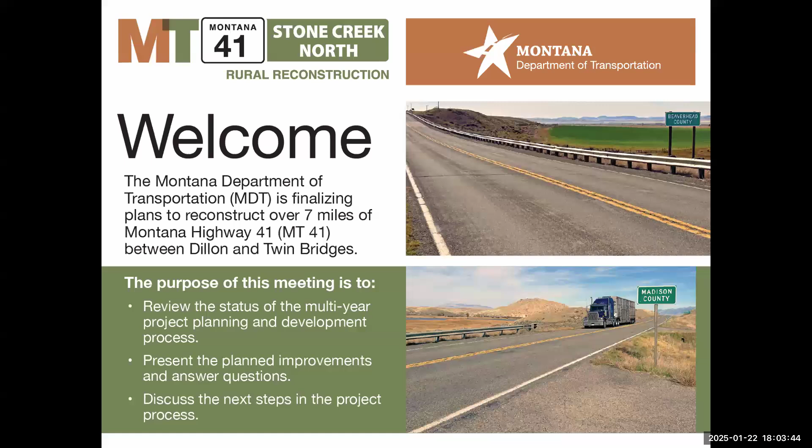Good evening, everybody. I'm Brandon Jones, Butte District Pre-Construction Engineer. Before I introduce the team, I want to read off MDT's mission statement: MDT's mission is to serve the public by providing a transportation system and services that emphasize quality, safety, cost effectiveness, economic vitality, and sensitivity to the environment. MDT maintains a staff with the resources and technical expertise needed to perform the workload for the majority of the state's transportation projects.

So I'll start introducing the project team, and we'll start off with Rebecca. Hi, I'm Rebecca Barbula. I'm with MDT, and I'm the Butte District Design Project Manager, located in the Helena office for MDT in roadway design. My team is responsible for producing the design plans and contract documents for construction, and I'm responsible for managing the project scope, schedule, and budget.

Thanks, Rebecca. Patrick Cross. Hi, I'm Patrick Cross. I'm the MDT Butte District Biologist, and my role is to work with the design team to minimize environmental impacts and ensure compliance with environmental regulations, and to coordinate with Montana Fish, Wildlife, and Parks on any fish and wildlife considerations that they have.

Thanks, Patrick. Sam? Hi, I'm Sam Ulrich. I'm the Environmental Project Development Engineer for the Butte District. I handle the National Environmental Policy Act regulations, as well as the Clean Water Act permitting for aquatic resource impacts.

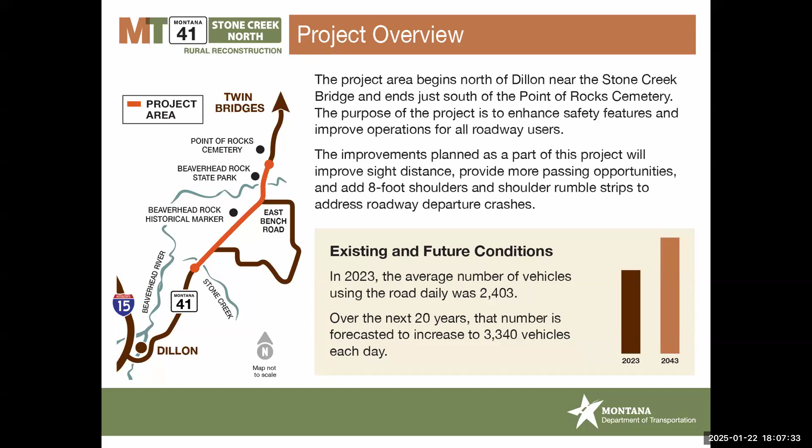And vehicle passing safety concerns. So some of the things we considered in the design included improving the sight distance, meaning how far a driver can see in front of them without an obstruction such as a hill, providing more passing opportunities, enhancing safety features, and addressing roadway departure crashes.

MDT began developing this project several years ago. Initial work included gathering and analyzing data, performing field studies, and hosting a public meeting. The information from the evaluations and the input from the public was carefully considered to develop the planned improvements we're presenting today. This project is now in final design and beginning the right-of-way acquisition phase.

Over the next about 2 years, MDT will be finalizing the project plans and permits, purchasing any necessary additional property needed to construct the improvements, and preparing for construction. The current schedule suggests the earliest construction could begin is in 2027, and construction is anticipated to take 2 full construction seasons to complete.

So essentially starting in summer 2027 and going through summer of 2028. However, construction is dependent on funding availability and will be scheduled once design plans are finalized and right-of-way and permits are acquired. Speaking of funding, on the next slide I'll share some information about project costs and where the funding for this project is coming from.

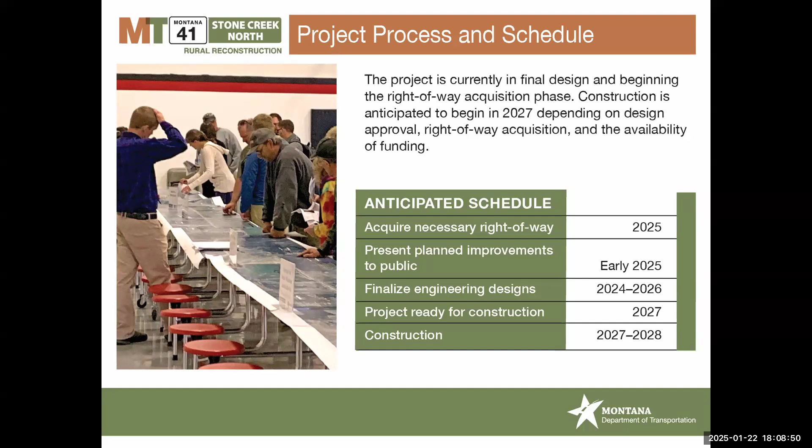This project is currently estimated to cost about $36 million to construct. MDT has acquired a $23.9 million grant from the Multimodal Project Discretionary Grant, which comes from the Infrastructure for Rebuilding America grant program. This grant program is overseen by the U.S. Department of Transportation's Office of the Secretary of Transportation.

Costs beyond the $23.9 million grant will be funded through a combination of federal and state funds, with a cost share of just under 87% federally funded and about 13% state funded. On the following slides, we're going to move into talking about the planned improvements and design considerations.

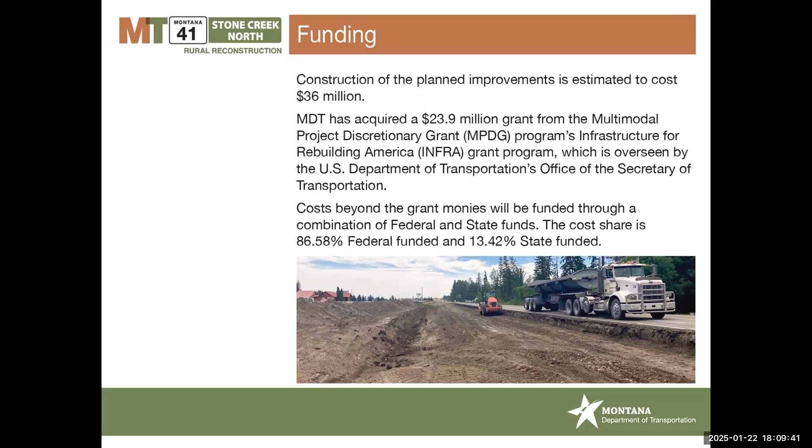As mentioned previously, Highway 41 is currently narrow and has steep slopes on both sides of the roadway and limited sight distance. MDT plans to implement several improvements with this project to enhance the safety features, including realigning the roadway north of the Beaverhead River, reducing the number of vertical curves and grades, which is also the steepness of the hills, and adding 8-foot shoulders.

As you can see in the image, we're going to be widening the total top width to about 40 feet, edge of pavement to edge of pavement. With that, we're also adding shoulder rumble strips and replacing the centerline rumble strips. We're also going to be flattening the steep slopes on the side of the roadway and upgrading guardrail and drainage within the project limits. I'll talk about the roadway realignment north of the Beaverhead River on the next slide.

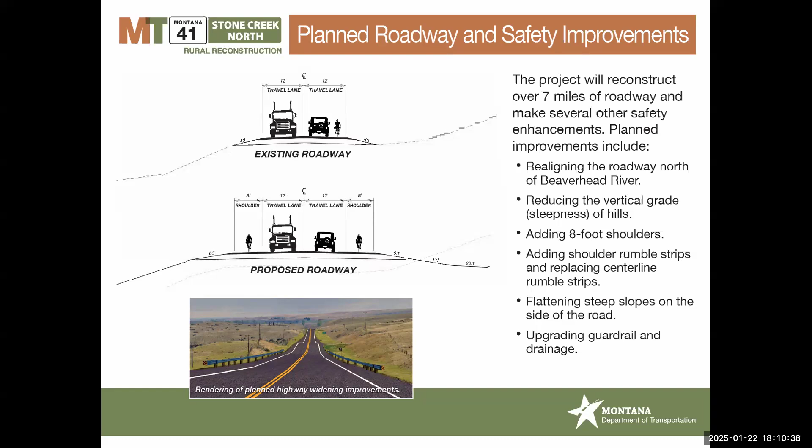MDT evaluated numerous roadway alignment alternatives north of the Beaverhead River Bridge. The top 3 alternatives shown on this slide were progressed for additional evaluation, where they were compared against several design criteria including cost, constructability, logistics from design, maintenance, and construction viewpoints, as well as environmental impacts. The orange alignment, as shown on the map view, can be seen traced right now.

It's the middle alignment being traced on the map view. On the right column of the table view, it says orange at the header. So that's the orange alignment, and it was chosen to pursue as the most practical and least environmentally damaging alternative based on the design criteria shown on the screen.

MDT teams involved in the design criteria analysis and evaluation included road design, which is my section, and the geotechnical section, which has to do with soils and the roadway foundation, making sure we're building on a stable foundation. Environmental, which covers wildlife, wetlands, and permitting. Hydraulics, which has to do with drainage, culvert drainage, as well as irrigation facilities in the area. Construction and maintenance were also involved in those evaluations, and those are just a few of the disciplines to name from the MDT side.

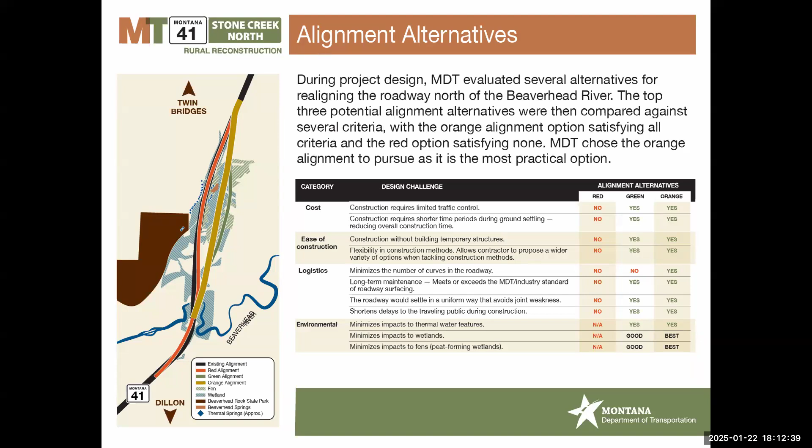As with any federally funded project, MDT needs to ensure the project is compliant with the National Environmental Policy Act, often referred to as NEPA, and its Montana companion MEPA. Using the NEPA-MEPA process, agencies like MDT evaluate the environmental and related social and economic effects of their proposed actions. Agencies also provide opportunities for public review and comment on those evaluations and their findings.

When a proposed action may significantly affect the quality of the environment, both NEPA and MEPA require the agency to prepare an environmental impact statement. Most of MDT's projects, including this one, fall under a categorical exclusion. MDT's categorical exclusion form is basically a miniature environmental impact statement.

This project is being reviewed under NEPA. This review includes a few other important federal acts. They include the Endangered Species Act for the handful of listed species near the project area, the Migratory Bird Treaty Act for nesting areas on the underside of the bridges, Section 404 of the Clean Water Act for impacts to aquatic resources, including wetlands, and Section 106 of the National Historic Preservation Act for effects on historic properties.

Additionally, other areas of consideration include wildlife crossings and recreational river activities. For this project, MDT conducted site investigations to look for potential environmental concerns and document the environmental baseline in the project area. Our analysis showed that the project should include specifications necessary to protect the environment.

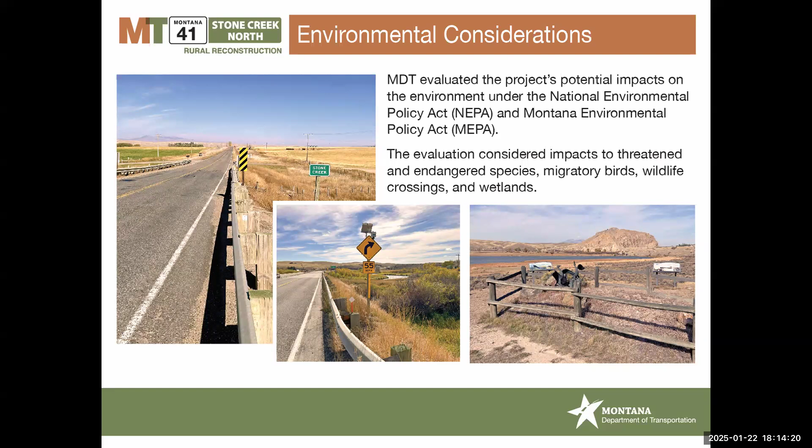In addition to the permanent design features, to minimize our environmental impact from the start, certain construction activities will have seasonal timing restrictions to avoid disturbing protected wildlife species and ensure compliance with some of the environmental regulations that Sam mentioned. Examples include, for trout conservation, there will be no in-stream work during the trout spawning seasons in the spring and fall.

That's part of our Montana Stream Protection Act permitting requirements, which are administered by Fish, Wildlife, and Parks. Stream protection permitting will also require that any equipment used for in-stream work must first be inspected for aquatic invasive species before the project begins.

For Migratory Bird Treaty Act compliance, any tree and shrub removal and removal of the Beaverhead River Bridge, places where birds might be nesting, must occur outside of the nesting season, that's from mid-April to mid-August. An exception could be if the contractor uses special methods of deterring nesting under the bridge, like installing nets that block access before the migratory birds arrive.

For golden eagle conservation, there will be no construction activities or staging within half a mile of Beaverhead Rock during the winter through spring golden eagle nesting season, in order to avoid disturbing documented nest sites there and ensure compliance with the Bald and Golden Eagle Protection Act.

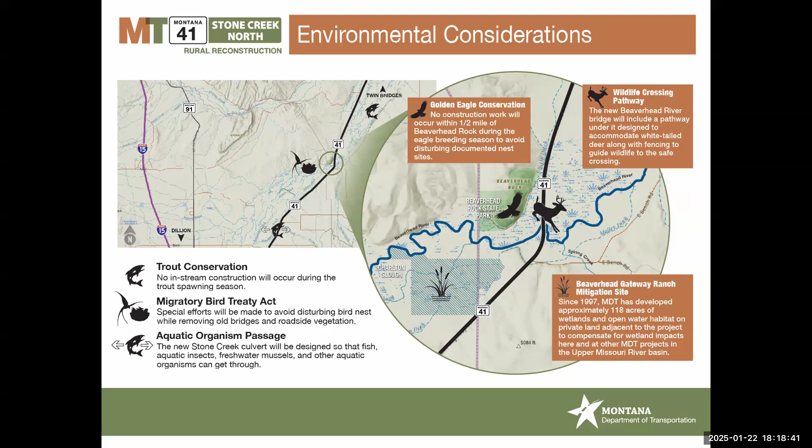The way it works is that every MDT project is reviewed for wildlife accommodation needs and opportunities. If recommendations for wildlife accommodations are made, then those recommendations work their way through all the MDT bureaus for review and approval. Approved wildlife accommodations for this project, which we'll see on the next slide, include a wildlife path that will be built under the Beaverhead River Bridge that provides enough headroom for white-tailed deer to cross.

There will also be wildlife barrier fencing, an 8-foot high woven wire fence that'll be installed on both sides of the Beaverhead River for about a half-mile total to help guide wildlife to the path underneath the bridge. That barrier fence will also include wildlife jump outs, which are one-way escape ramps that let the animals jump out away from the road, but not jump in towards it.

There will be wildlife guards, which are like double-wide cattle guards, and they'll be installed at approach roads and driveways to minimize the new fences' impacts on local traffic.

We'll also be considering an experimental electric wildlife deterrent mat at both fence ends to prevent wildlife from getting into the fenced section. There's an example of one that's in use on US 287 near Toston between Three Forks and Helena.

And then we will also on this project be including wildlife warning signs with flashing lights at the fence ends. So outside of the wildlife barrier fencing, we'll also be using wildlife friendly fencing, which is a 4-wire design intended to keep cattle and horses in while letting wildlife either jump over the fence or squeeze under it, and that'll be installed where appropriate as coordinated with the adjacent landowners.

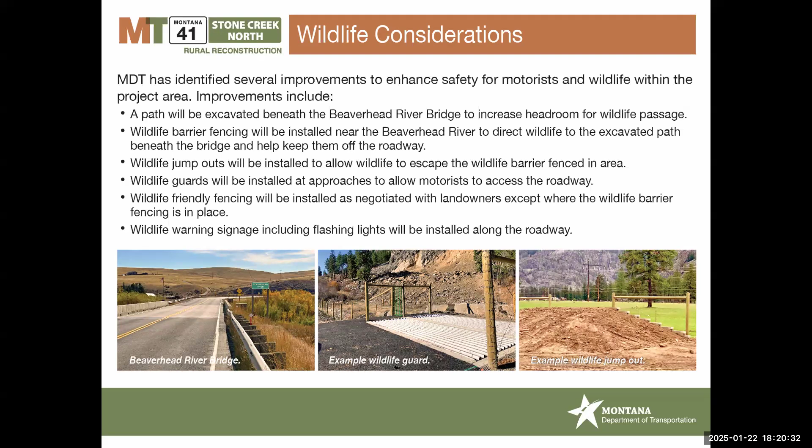So now I'll turn it back to Rebecca, who will talk more about some of these design features in detail. Yeah, thanks, Patrick. So I'm going to talk about the bridges next within the project. There's currently 2 existing bridges that are within the project limits, one at Stone Creek and the other one at Beaverhead River. So I'm going to talk about both of these structures and the planned improvements for them.

And I'm going to start with the Stone Creek Bridge, which is located at the beginning of the project near milepost 9. MDT is going to be replacing the Stone Creek Bridge with a double cell concrete box culvert for both stream and livestock passage. MDT teams completed analyses to determine the size of the culvert that's required, as well as the location of the culvert to align the stream side of the box culvert with the natural stream bed. The bottom of the stream side of the culvert is going to be covered with gravel and other natural stream bed material in order to provide better passage for fish and other aquatic organisms. The bottom of the livestock side of the culvert is going to be covered with dirt and gravel to match the surrounding ground cover.

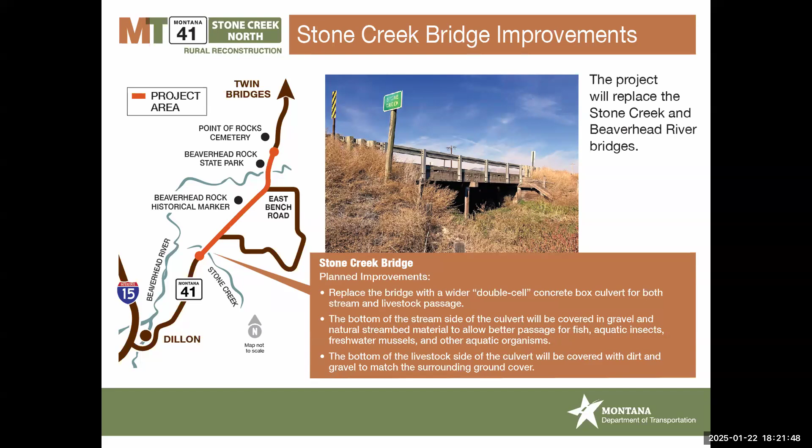So now I'll move over to the Beaverhead River Bridge. It's located near milepost 14.7, about halfway between East Bench Road and the Beaverhead Rock Road, which is the entrance to the Beaverhead Rock State Park. MDT is going to be removing and replacing the Beaverhead River Bridge with a new structure. The new bridge is going to be about 181 feet long, and it's going to be a single span design, which means there will be no piers. This allows for improved movement and passage of wildlife underneath of the structure.

Additionally, the bridge is going to be widened to accommodate the 12-foot travel lanes and 8-foot shoulders that are within the entire project limits, so the new bridge will be a bit wider. The new structure will also have a 75-year design life with steel beam girders and a concrete deck as the driving surface.

The new structure will be built to the east of the current bridge. This allows us to use the existing bridge for traffic during construction of the new bridge. I'll talk a bit more about traffic control on the next slide.

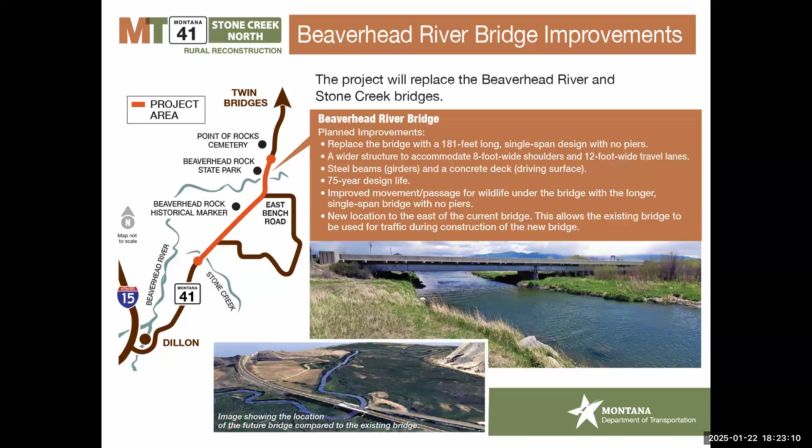The final traffic control plans have not fully been developed yet. However, we're moving forward with plans to construct some of the highway and the Beaverhead River Bridge to the side of the current highway to minimize impacts and delays during construction.

MDT will require the contractor to keep accesses to homes and properties open during construction. There may be times of short-term closures when new asphalt is laid in front of an access, but the contractor will communicate with property owners during those times. Emergency vehicles will always be accommodated through the construction work zones.

We will have more information about traffic control and how to stay informed during construction as it gets closer, so just know that is forthcoming. Now I'll turn it back over to Brandon Coates with RBCI to talk about next steps in the project.

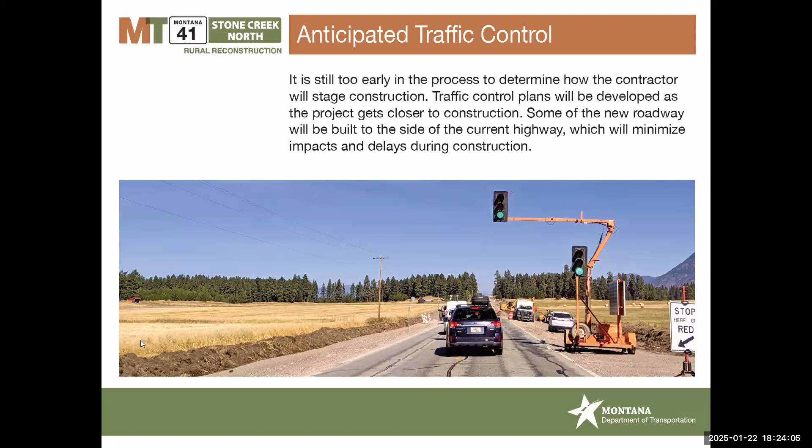As we discussed earlier, we're currently in the final design and beginning the right-of-way acquisition phase of the project. The design team will continue finalizing the contract documents for construction and acquiring property necessary to build the new project. At this stage, minor changes will be evaluated and negotiated with landowners, but major changes such as moving the alignment or adding turn lanes are no longer feasible.

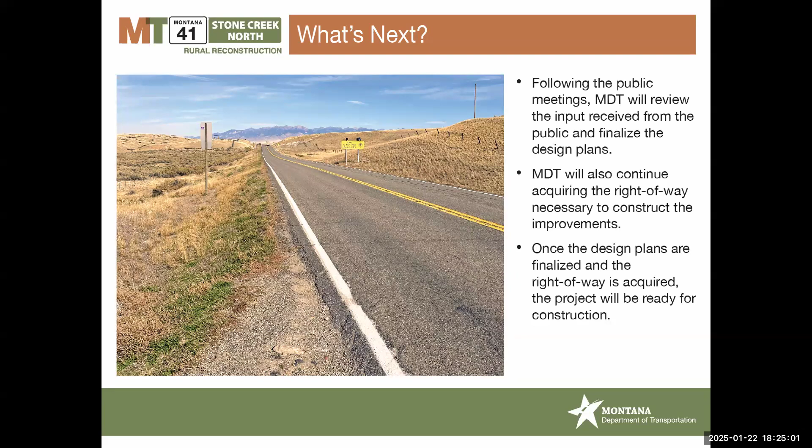Once the plans are finalized, right-of-way is acquired, and funding has been allocated, the project will be let for contractors for bidding. Construction will be announced once the funding and bidding process is complete. Again, the current schedule suggests that the earliest construction could begin is 2027.